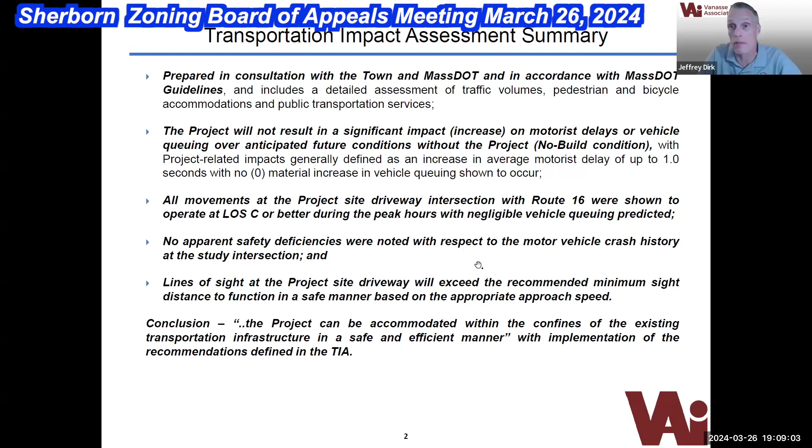The actual sight lines exceed 600 feet. So I misspoke there for a minute - we need to have 425, and we have over 600 feet of clear sight lines with some minimal vegetation. So it's far in excess of what's required.

So drilling down a little bit on the traffic study itself. This slide just shows the location of the project as it exists along Route 16. Lots of vegetation on the slide here. Route 16 is traveling basically, as you look at the slide, from the lower left to the upper right. The site abuts Route 16.

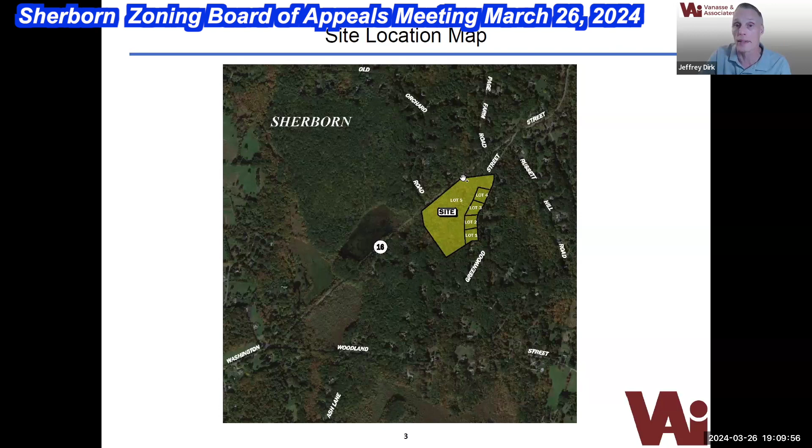You also see that we've called out 4 lots that abut Greenwood Street. We have accounted for those in the traffic analysis. They're not associated with the larger project, which is on lot 5, but we did account for single family homes being developed on the 4 lots that front along Greenwood Street. That's just an important thing to point out as we did our traffic analysis - we didn't ignore those lots. Those have been reflected in essentially the background developments for the project itself.

This slide shows the study area that was evaluated as a part of the impact assessment. Generally, what you look at is a major intersection on either side of the project site. So the major intersections on either side are Greenwood Street and Woodland Street. Those are the locations where if we start with the project site along 16, some of the traffic turns left, some turns right.

It disperses itself, it gets to one of these intersections on either side of the site, and then the numbers kind of drop off. Some of the traffic will come and go from Greenwood Street, some will come and go from Woodland Street. So as you get outside or beyond these two intersections, the numbers generally drop off to on the order of about 20 vehicles over the course of an hour.

So that's one additional vehicle every 3 minutes. Once you get beyond these two intersections, the impacts of the project would be basically within the existing traffic stream. You wouldn't notice the additional traffic, so you wouldn't show measurable increases in delays or vehicle queuing.

So I had mentioned, just by way of context and looking at the slide here, that Route 16, where the site is located, accommodates about 9,900 vehicles per day.

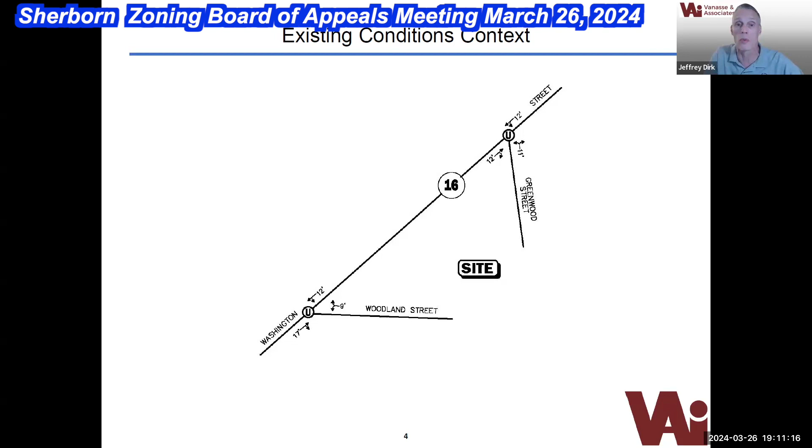The peak hour traffic volumes - so when I was mentioning the 35 to 40 vehicles on the roadway during the peak traffic volume hours, I'm sorry, I'm skipping ahead here. During the peak hours, roughly about 10% of that traffic - so if we have 9,900 vehicles, during the peak hours, 1 hour in the morning and 1 hour in the evening when the traffic volumes are the highest, the roadway accommodates somewhere around 950 vehicles, two-way traffic again during the peak hour.

The peak hour where the site is located in the morning occurs between 7 and 8 in the morning. And then in the evening, the peak hour is 4:15 to 5:15 p.m. So that's the peak on the roadway.

And we're going to speak in a minute about how much traffic we're going to add to the roadway during those peak time periods. There's no sidewalks as we look at this section of roadway.

There's also no bicycle accommodations, although Route 16 is sufficiently wide to have a shared travelway condition, so that you can ride a bike on Route 16, and if a motor vehicle is traveling and passes a bicyclist, it does not have to cross the center line. So that's what we mean in terms of it being a shared road type of accommodation.

There's no public transportation services, although we did note in our assessment that the Council on Aging does coordinate transportation services for seniors. So that's something that, as we talk about recommendations related to transportation demand management, we want to make sure that if there are seniors at the project site, they do have the contact information for the Council on Aging.

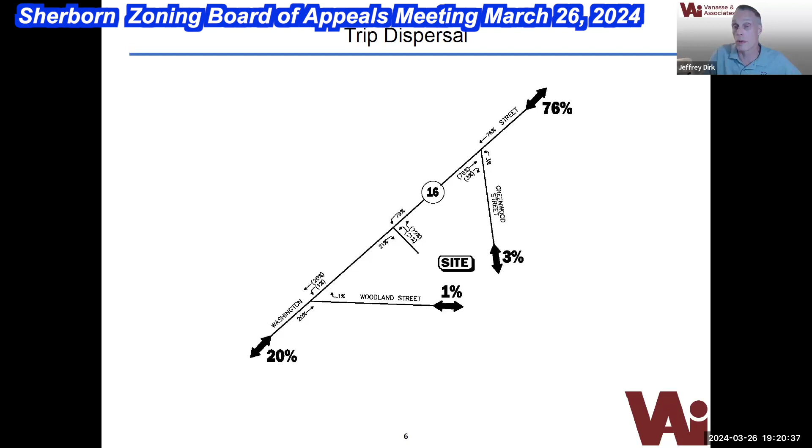And again, if you looked at the delays, they didn't go up by more than 1 second during the peak time period. So low traffic generation from the project as we added to the roadway network, no safety deficiencies, no operational deficiencies, and the impact of the project was generally about a second increase in delay and didn't see any change in terms of vehicle queuing.

So as we focused on our recommendations for the project, we have two sets of recommendations. The first is as it relates to the design of the project itself, and then the second set is to, to the extent we can, encourage people to use alternative modes of transportation. So this first set of recommendations deal with the site plan itself, and these are reflected on the site plan.

So we know that the driveway is going to be 22 feet in width. In fact, I believe, and Bob can speak to this in a minute, the fire chief had requested the 22 feet. That's reflected in the site plan, and it's reflected in the turning analyses that we've done for the fire truck. So we've demonstrated the fire truck can get in, circulate within the site, and then exit with the 22 feet in width. That's what's proposed for the driveway.

Within the project site where we have parking in place, the driveway, the aisle behind the parking is 24 feet. 23 feet is the minimum that's required for vehicle maneuvering to get in and out of the parking spaces, so the site plan reflects something that's in excess of that.

Exiting the project site, we have a stop sign. All signs and pavement markings within the site will be consistent with state standards, which is in the Manual on Uniform Traffic Control Devices. We do have a sidewalk along one side of the driveway that will extend out to Route 16, and this is where the bus will pick up. So we want to make sure that there's an ability for children to walk out to Route 16, have a safe place to wait, and then the bus will pick them up at that location.

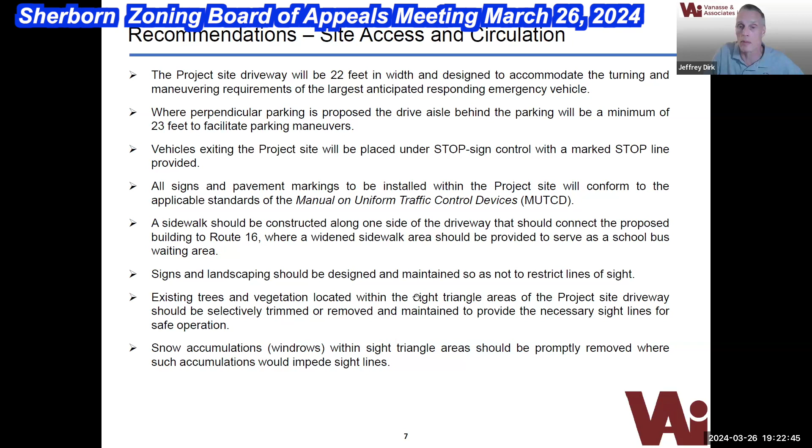So the last set of recommendations, and hopefully I'm sure I've gone past the 15 minutes, but this is just really quick. We don't have public transportation services at this time at the project site, but it is important that residents understand where the closest public transportation services are. Most importantly, that they do, if you're a senior and you live within the project site, that you have the contact information for the Council on Aging, who will arrange transportation services for seniors. Also, bicycle accommodations, so we have bike racks and weather protected bicycle parking as well within the project site.

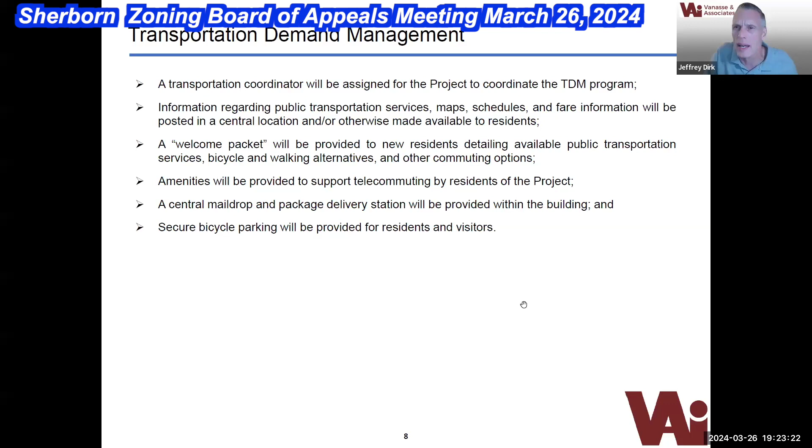That is the last slide, and I will stop sharing my screen.

Okay, well, thank you very much, Jeffrey. Yep, you're welcome.

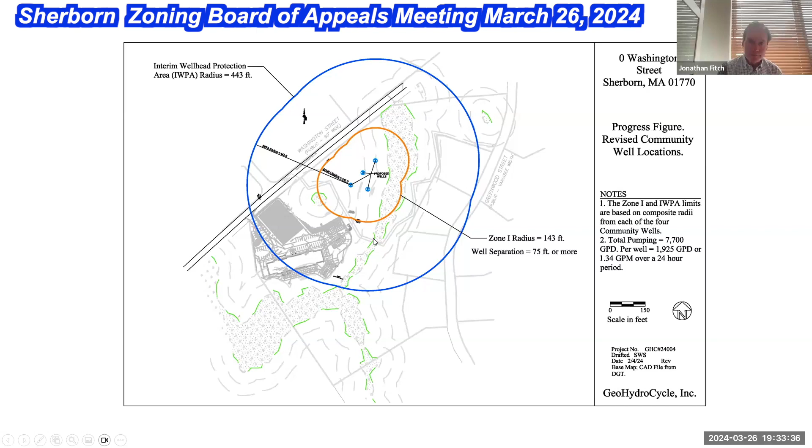A public well is basically a well that provides water to a group of people. In the Commonwealth, that group can be 25 individuals that get water for at least 60 days of the year, and that certainly includes a residential development such as the Sherborn, the Washington Street Sherborn homes.

Public wells are divided into two groups: greater than 100,000 gallons a day, and less than 100,000 gallons a day for smaller wells, such as the Washington Street wells. We're looking at basically 7,700 gallons per day for those wells, and for each of the wells that would be 1,925 gallons per day, or only 1.34 gallons per minute over a 24-hour period.

Basically what a public well is.

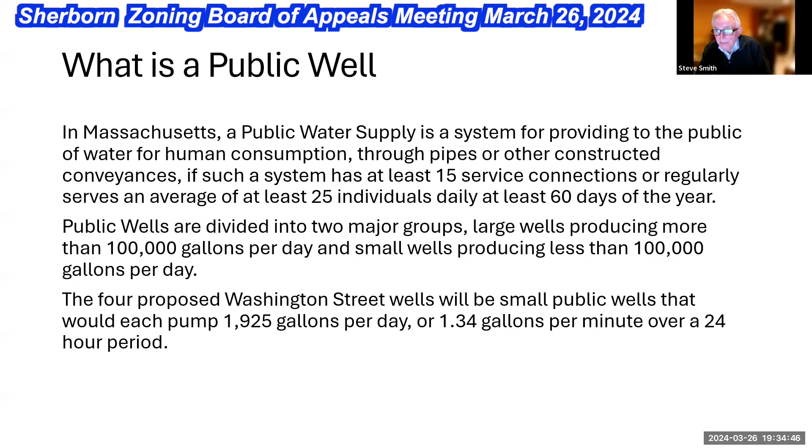There's a permitting process that the state goes through to permit public wells of this size. It's a lot more complex for the larger public wells, but for smaller public wells you can break it down into two steps. The first step is explaining to the state in paper what the overall project is, what's the zoning and land use for the area, existing and potential sources of contamination, what are the environmentally sensitive areas, and how we're going to test the well. We're required to do a pump test for all four wells and sample the wells during the test and at the end of the test to get an idea of what the water quality is.

All of this information is submitted in a report to the Massachusetts Department of Environmental Protection. Their goal is to look that over and see if it basically passes at least the paper test to see that it could be a possible small public supply well.

If it passes that, they'll approve it and we'll be allowed to go on to the second step, which includes installing the wells, drilling the wells, installing pumps in the wells, and conducting a pump test, which would probably go on for two days. During that time, you monitor groundwater levels in the wells, you sample the wells midway and at the end of the test. All of this is put into a document, an application to the state, requesting that the wells be made small public supply wells.

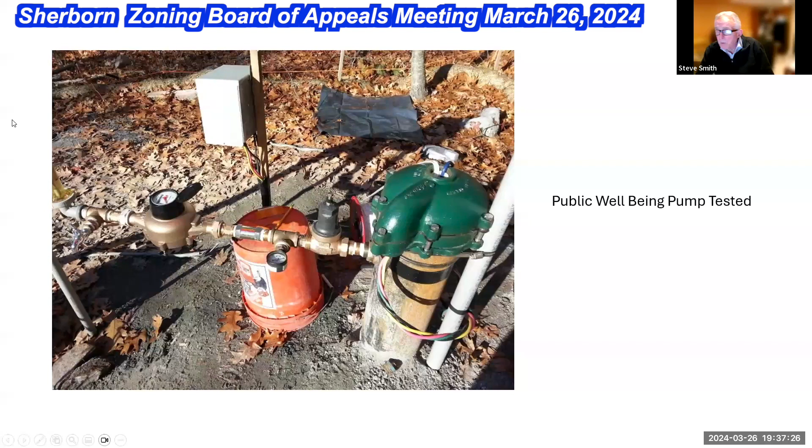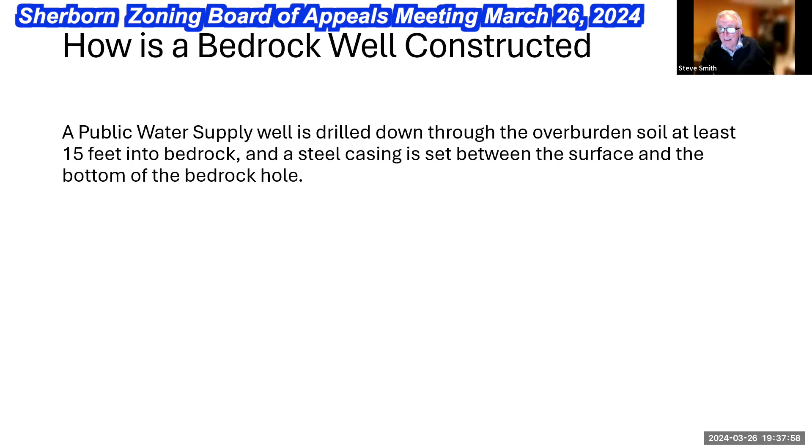How is a bedrock well constructed? The first part of the well is to drill through the overburden, drill through the soil down about a minimum of 15 feet into bedrock. At that point, a steel casing is set down into rock that goes from the bottom of that 15-foot hole up to the surface, and at that point we're ready to grout the well.

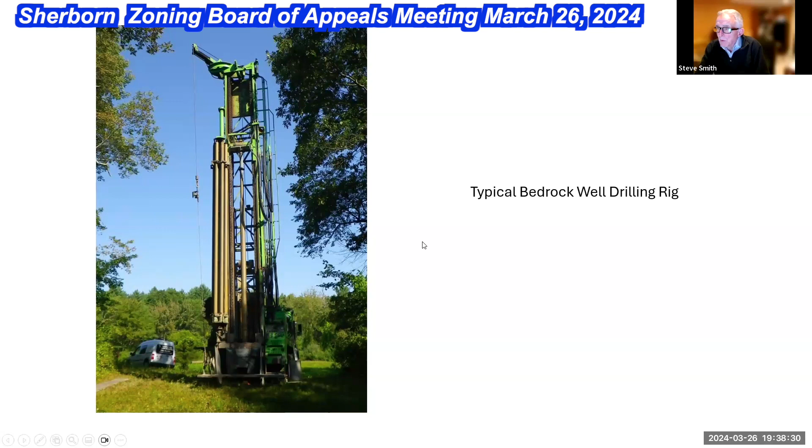Once the casing is in place, a cement grout mixture is injected into the well casing where it rises up. The idea is the grout cement is meant to form a seal between the soil and the steel casing, and the purpose of the seal is to prevent contaminated water, surface water, from flowing down along the casing and contaminating the well. It's a very important part of the well construction and something that's looked at very carefully.

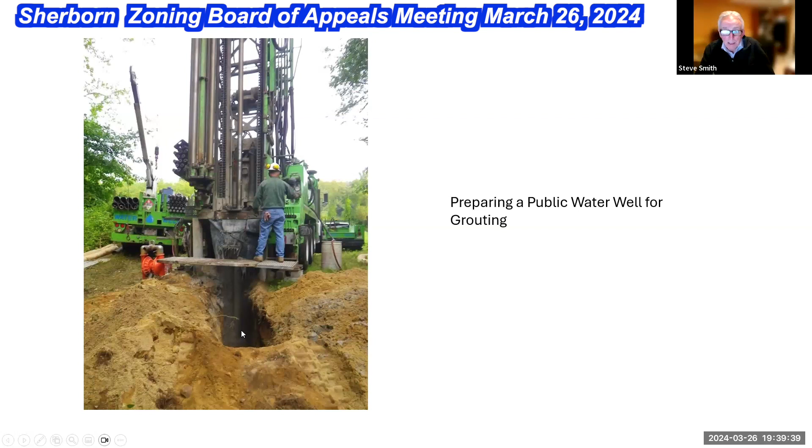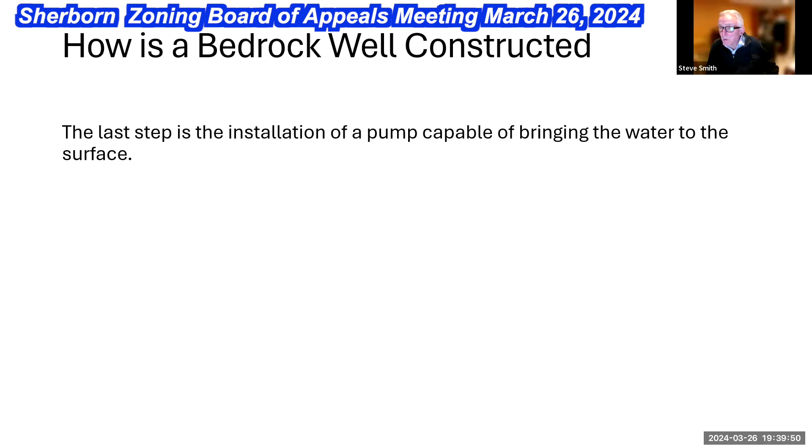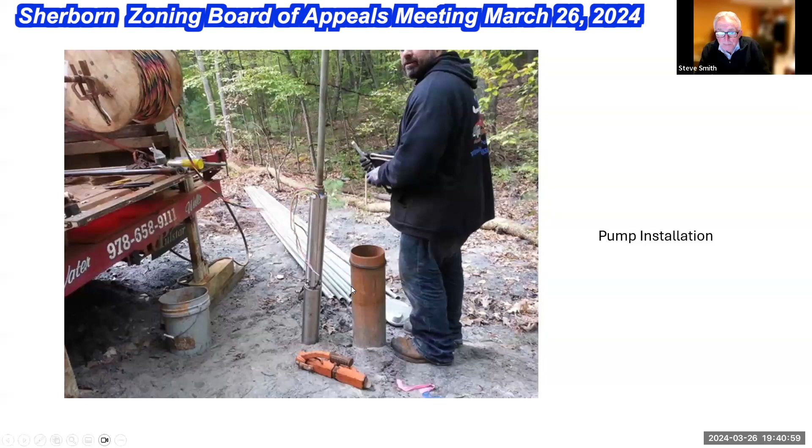How was the system operated? We've been successful. We have a permit, and the system is being operated. One thing that has to happen is that a water company has to be created for a public well, and all 4 wells will be part of that company. The company is set up to operate the wells, provide budgets, maintenance, water sampling, backup plans, and regular operation of the wells. And it all has to be documented and submitted to the state for their approval.

A typical sampling of a public well of this size would probably be on a quarterly basis. You sample for general chemicals, some volatile organics, some secondary chemicals, indicator chemicals, and likely PFAS, because it's become such a ubiquitous contaminant in our world.

So that's basically a summary of small public wells that we're looking to do for the Washington Street Sherborn Homes project. And I'm available for any questions if there are any.